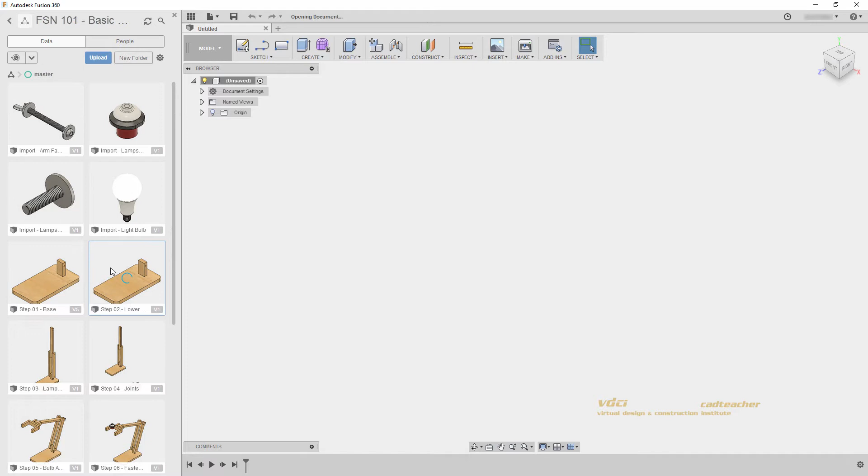I will go to my data panel and open step 02 lower arm. Remember, you can open with a double click or right click open. When my file is open, I will close my data panel and we can begin to build our lower arm.

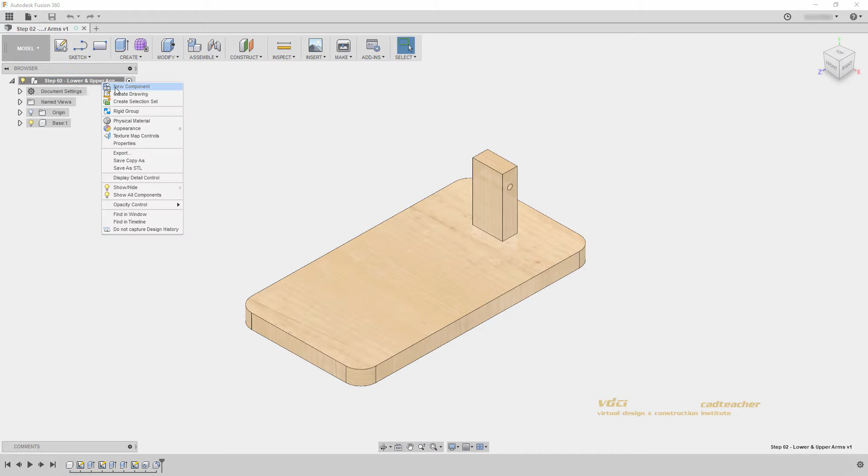The first thing we need to do is create a new component. I can go to the new component button, or right click on this component and select new component, which will make a new component nested inside. I will double click on my name and rename it lower arm. Enter.

You will notice that all of the objects in my base component have become grayed out, and this is because they are not in the active component. So let's build our first sketch.

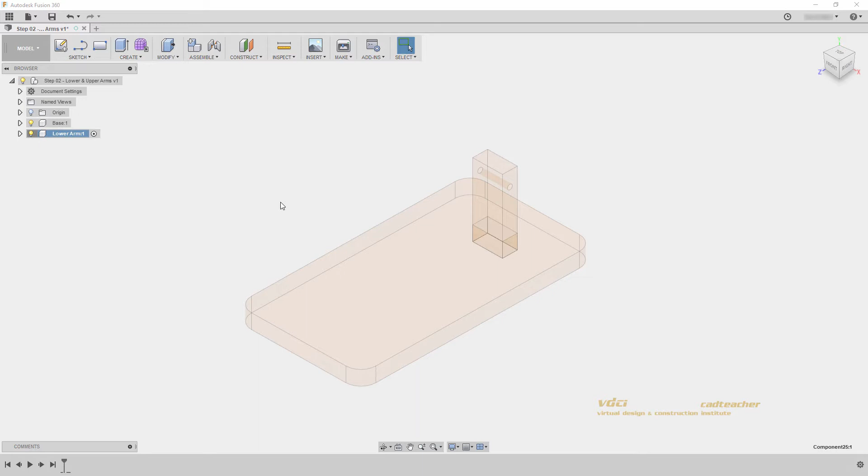With lower arm active, I will create a sketch and choose the same face which I chose earlier to create my hole. My view will reorient to this view, and let's create a rectangle. My arm will go somewhere like this, so I'll draw it roughly to shape.

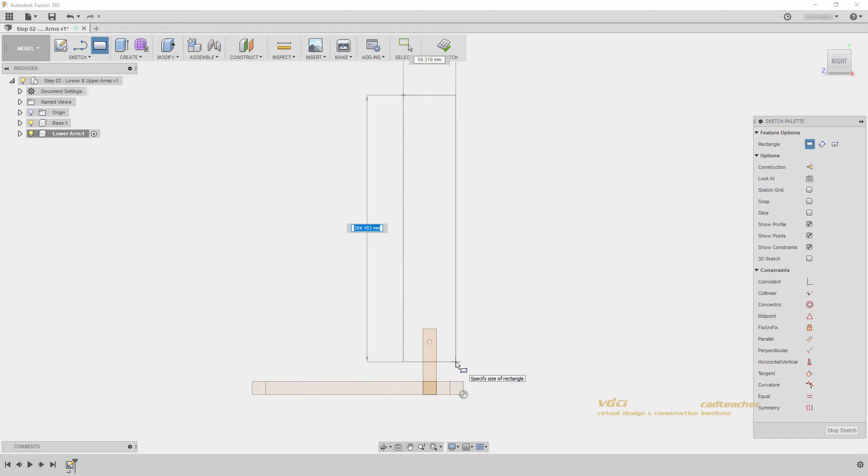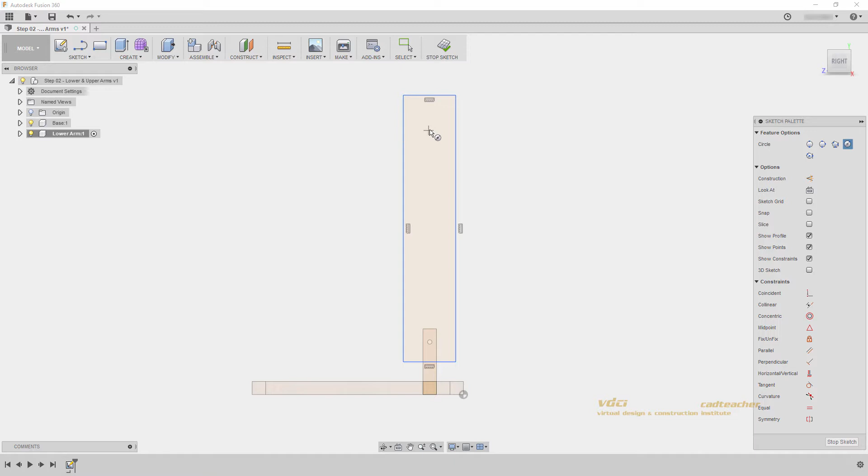Next, we know that there will be a second hole here, but instead of drawing a new point and creating a separate hole command, we will build our hole using the extrude. So I will go Sketch, Circle, Center Diameter, and I will draw my circle here. Again, I will not worry about the dimensions now; I will make my dimensions in a minute.

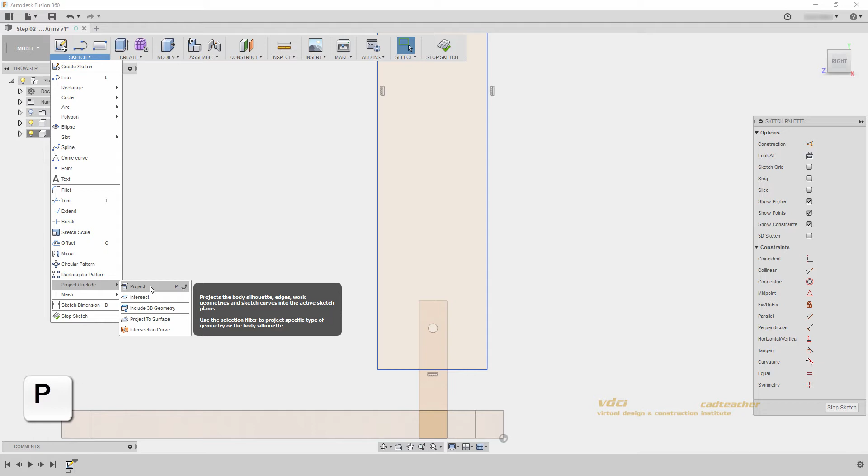The last circle we need is the circle that will go on top of this object. Because we are building our geometry in location and in place, we can use projected geometry. If I go to Sketch, Project Include, Project, which is the keyboard shortcut P, you will see this project window appear. I can select specific entities or entire bodies. I will select specific entities, zoom in, and select this circle.

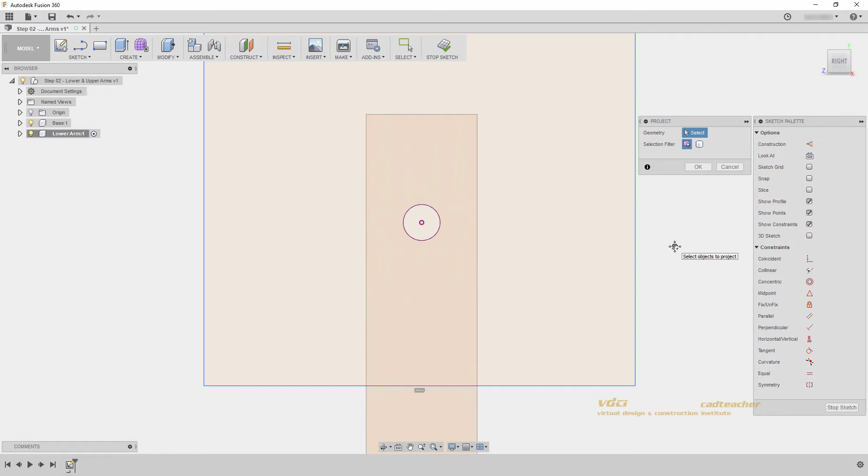It may be hard to see on your screen, but you will notice that circle has now become a dark purple color. This means that sketch geometry is now present in my current sketch and is non-editable because it is projected directly from my 3D geometry. I will hit OK, and now we can begin to dimension and constrain our sketch.

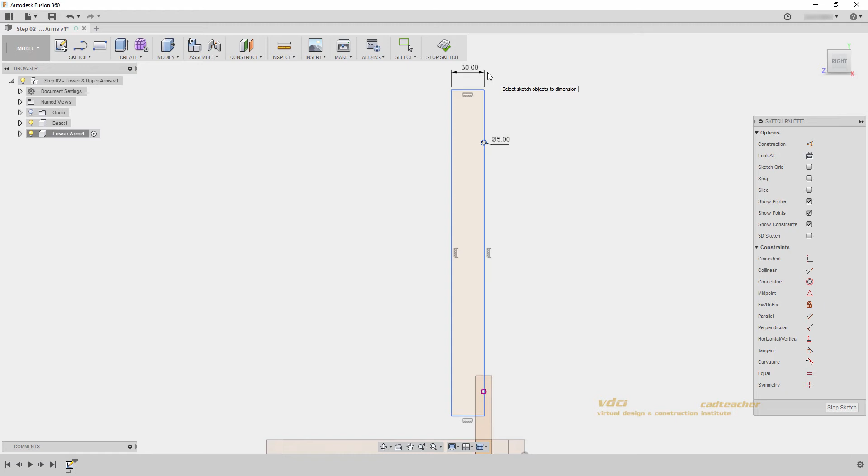First, I will go D for dimension, select my circle, and make this 5, enter. Next, my rectangle will be 30 millimeters wide and 285 tall.

If your geometry is moved, that's okay. Click and drag on your geometry to move it back into approximately the right location.

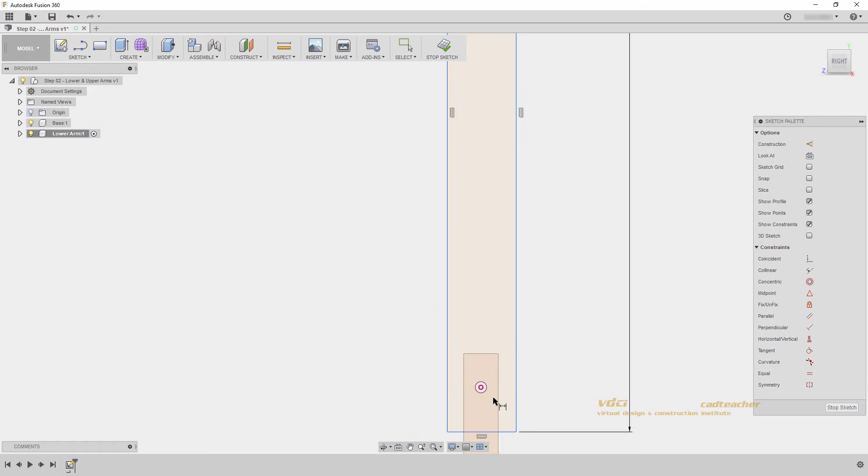Next, let's dimension our circles to the edges of our rectangle. I will zoom in, select the center of this circle and this endpoint, and make this 20, enter, and I will do it to the top as well: 20, enter.

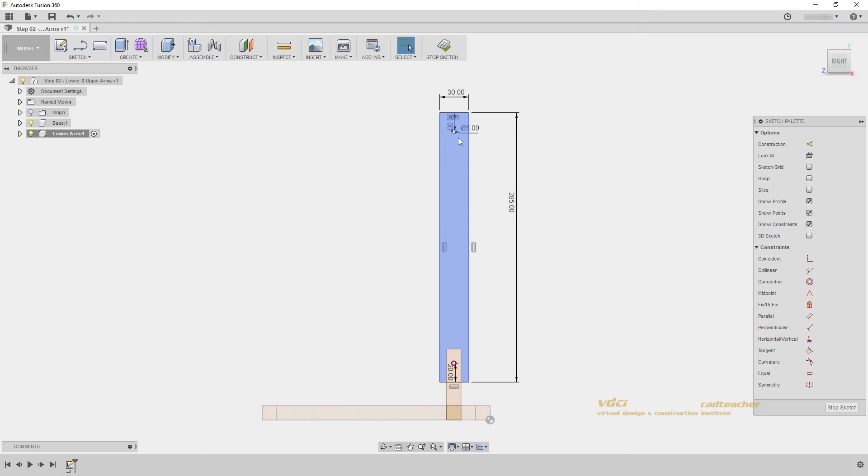Notice that my geometry can still move side to side. So instead of dimensioning this geometry, I will place a horizontal vertical constraint. If I zoom in here with nothing selected, I will select my horizontal vertical constraint. When I hover over this circle and click the center, you can see that I want to snap to the midpoint of this line, but I can only select the endpoints.

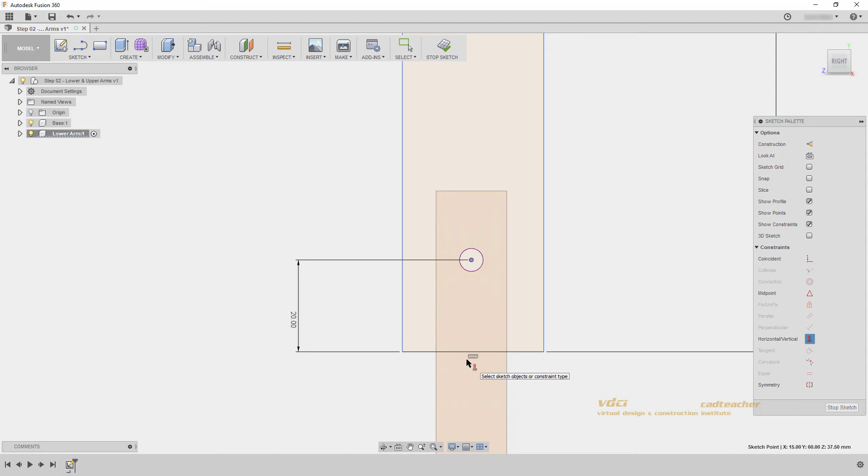By holding down Shift on my keyboard, I can open up my O-snaps. As I hover over the midpoint of my line, you will see the midpoint snap appear. By clicking with Shift held down, I can snap a horizontal vertical constraint from the midpoint of this line to the center of that circle.

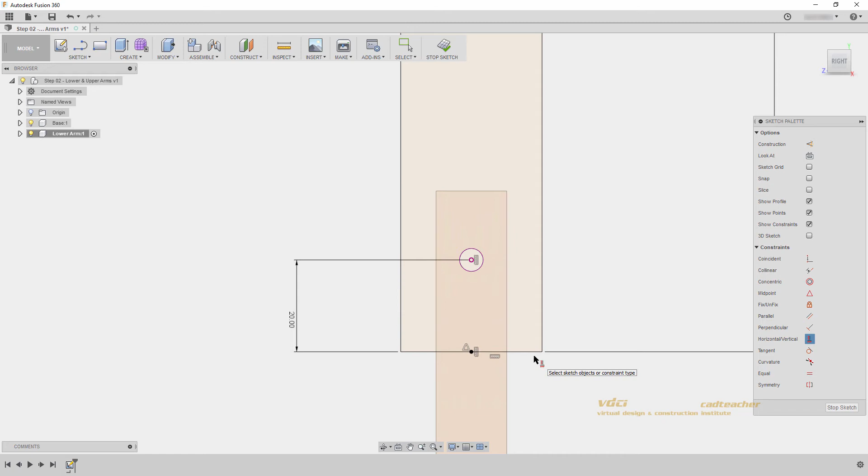Let's do that one more time for the circle at the top of our arm. I will select horizontal vertical, select the center of my circle, and holding Shift, select the midpoint of this line.

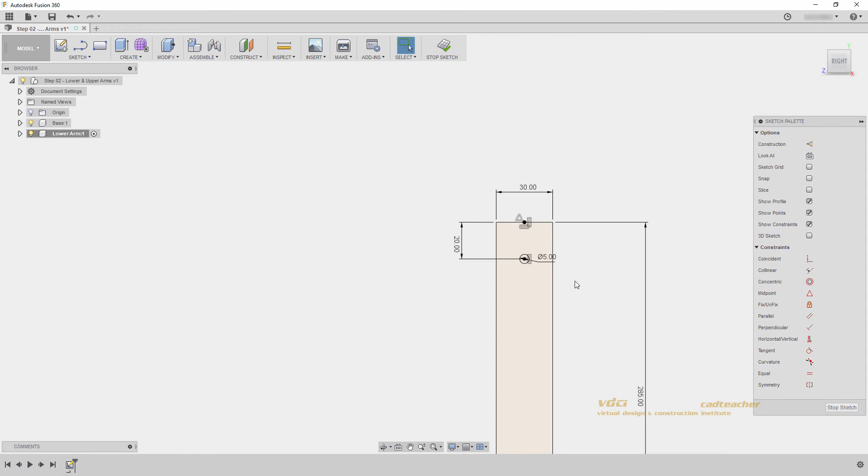You can see that my geometry is either purple, as it is projected, or black, which means it is fully dimensioned and constrained. We can now hit Stop Sketch, go to our home view, and go to Extrude.

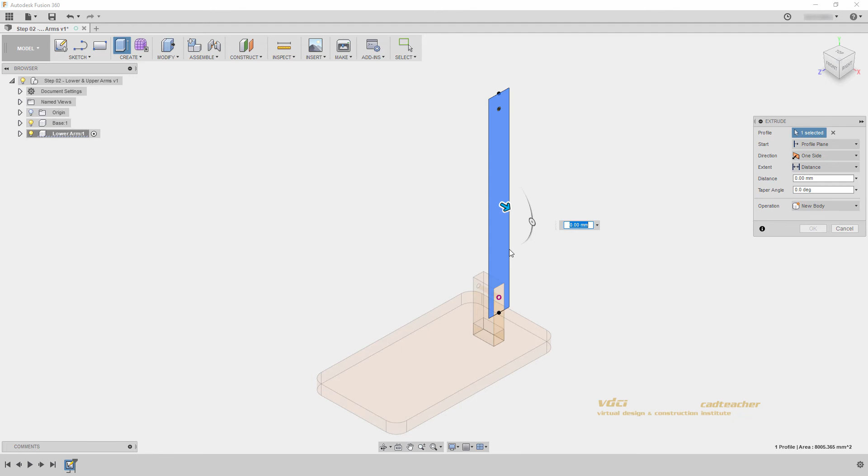Notice that when I hover over this rectangle, the bottom portion is not selected. This is because my projected geometry has split this face and this profile into two separate sections. I will need to click once here and here to select my full rectangular face.

I can now drag out 15, enter, and we will see that the arm with the holes already cut out has been modeled.

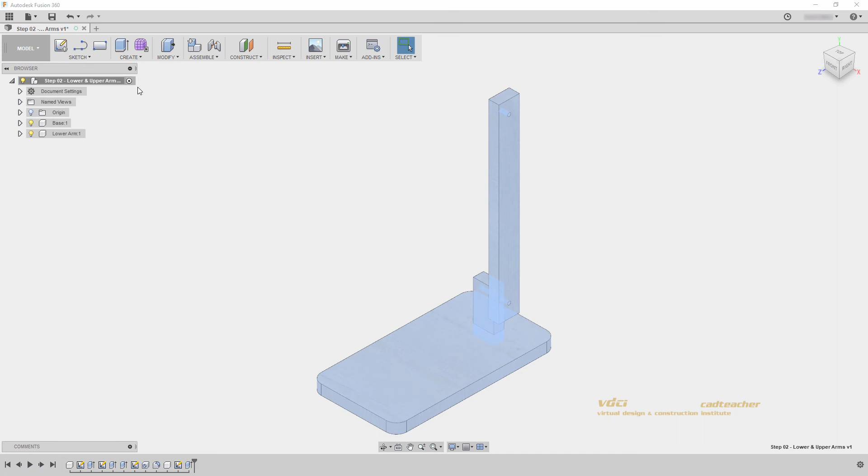I am done modeling in this component, so I will activate my main component. To finish this video, I would like to create a second arm on this side of my lamp. We can do this by simply copying and pasting our existing component.

If I go to my lower arm component, right-click Copy, I can hit right-click Paste, and it will paste a copy of my component directly on top of my old component. When it has pasted, the Move command automatically opens.

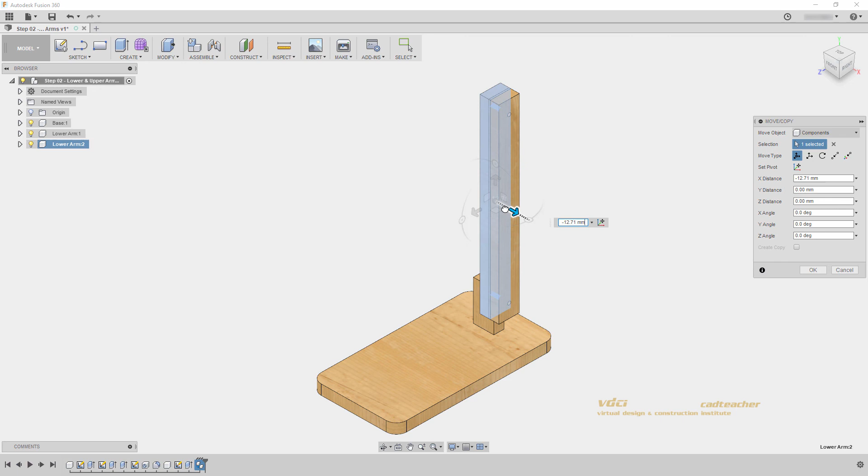In the Move command, I can use my sliders to move my object along 3 directions, use Rotate to rotate my object about my axes, and use these square grips to move along 2 axes or a plane. I will hit Cancel and delete my old component, and again go right-click Paste.

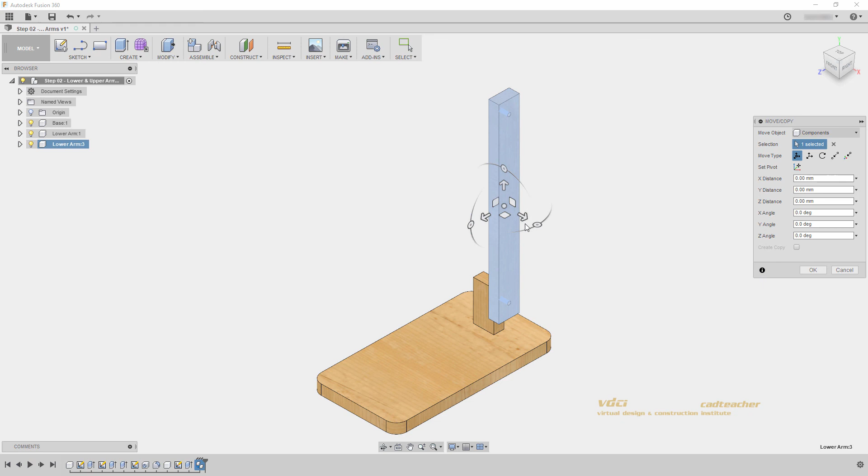I will now slide along my x-axis, -45, and that will place my other arm directly opposite my first arm.

I will go to my home view and save my file. Again, feel free to write whatever description you would like. I will leave this as user saved and hit OK.

In the next video, we will build the upper arm and create an assembly component. I will see you in the next video.